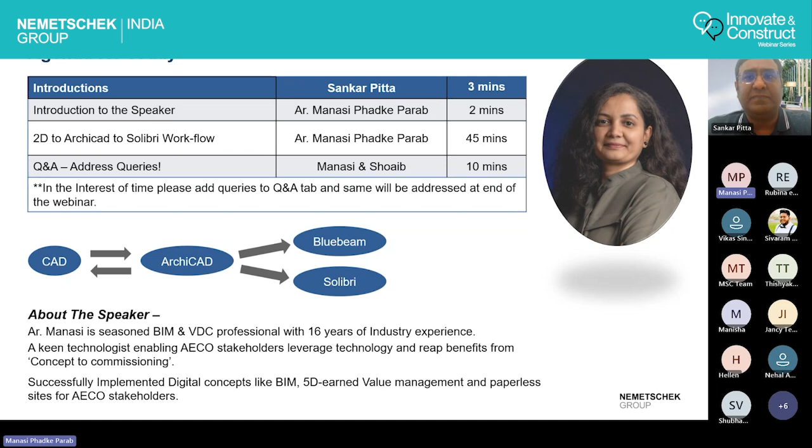To give you more insight on interoperability, we'll start off with a drawing file which goes into ArchiCAD. It comes back to the CAD environment through translators. Then this smart BIM authoring tool will push the data in terms of 2D PDFs and 3D PDFs to Bluebeam, which is again a collaboration tool.

And then we'll also push it to Solibri for all the automated design checks you can do, once all this information is flowing seamlessly from a CAD drawing to PDF, back to a BIM authoring tool, and then it goes and comes back to Solibri as well. So all these tools from the Nemetschek family have bidirectional interoperability with the popular drawing tools, and we'll see how exactly this workflow works shortly. So let's begin.

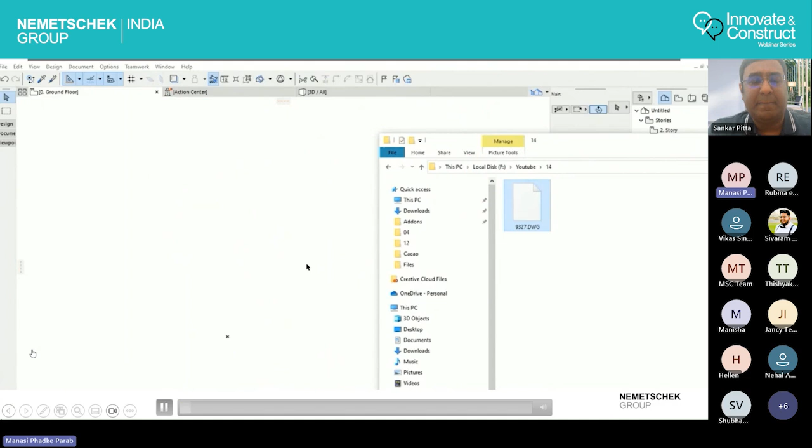So we have a blank ArchiCAD instance for you. Let me show the simplest method of drag and drop. Clearly, I don't have AutoCAD with me, hence the format is seen as .dwg. I'm dragging it. We can place it simply to the point and it's asking for units, so don't forget to add units. Let me select meter, meter here, and then we can simply place the instance.

Now we can go ahead and drag that instance to be placed at a proper origin point, or we can define the coordinates. Let me pick one and place it to the default origin of ArchiCAD in this instance.

So this was the simplest method, and now I can start drafting by picking the ArchiCAD wall tools. I'm picking the simplest generic wall, and you can always start drafting or mapping the same CAD instance with all the beautiful tools in ArchiCAD like walls, doors, windows, staircases, and so on.

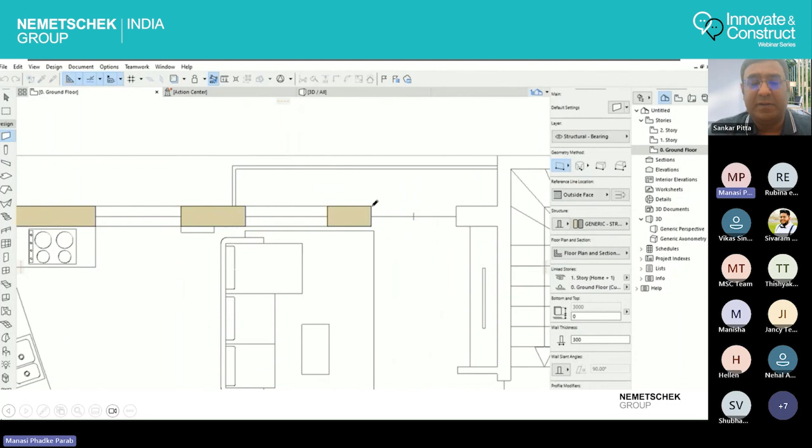So once we have this method here, we can see that it also has a drawing space. Let me take this pet palette here and I'll try to expand the drawing space of this particular CAD instance. Now, why is this important?

While I'm editing this drawing space, whenever I take something as a reference for modeling or drafting, this pet palette allows me to expand, edit this instance with the drawing or the paper area, what we call it, so that whenever I move this reference, I will always get the extents of this particular drawing defined as per my drafting requirements. So let me just edit this.

We are doing an offset now, and I'm also cutting it so that it maps with my exact structure plan or structure elevation. So now if I select this particular drawing instance, I can deduct, like I added a particular portion in the drawing space, I can also deduct a part of this drawing space for ease of working, so that when I have my paper space defined from the instance, I will know exactly how to add or attach these frames when I want to bring in some new references after this.

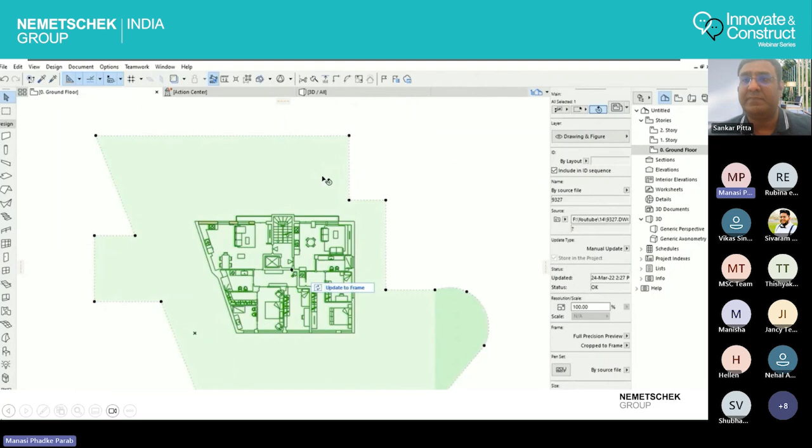So once I have this drawing reference with the proper drafting and paper space, and once I have this ready with the paper pet palette, I can simply drag this instance and you will see that the walls that I drafted just remain there. Do you see, when I'm trying to move this CAD instance, it is still within the limits of the drawing or the paper space that we selected, and the walls just remain there.

So we have a blank ArchiCAD instance. Let's delete this instance and let's look at the second and third method.

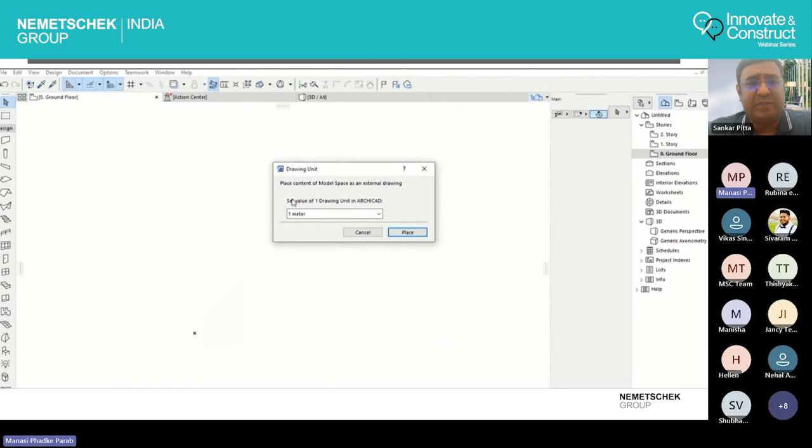We'll go to the external content. We'll simply place an external drawing with the native file formats or file format, that is CAD, and it will prompt units again, and we'll just bring in the native units and the settings from CAD and place the drawing just by clicking on the model space. So this particular instance will bring in all the native format and units, and this is another method to just bring the instance and start modeling.

So let's look at the third method, a little intelligent one, that is XREF. As the name suggests, I can attach an XREF here, and please remember that this particular method will allow me to seamlessly model with a particular reference, because of the changes and revisions.

For example, if someone is changing anything in the CAD instance, when I XREF it, I can reattach and reload the same drawing and still continue with the modeling along with the changes that may parallelly be happening in the 2D environment by some vendors who are not on the BIM path.

So we'll bring in a file again. We can check which particular drawing we want to XREF here. So we'll pick a drawing here.

I'm sure most of you would be aware of the two types of XREFs, that is attachment and overlay, wherein it works exactly the same in 2D as in ArchiCAD also.

And once we have our XREF here, we can further specify whether we want to align this particular file with certain origin, or specify XY coordinates, scale some coordinates or rotate a particular CAD instance, or simply specify the anchoring and the bounding box nodes also. Meaning I can specify when the CAD instance changes, from which point exactly is this going to change the instance. So bounding node or drawing's own origin will allow me to change these settings for my drawing.

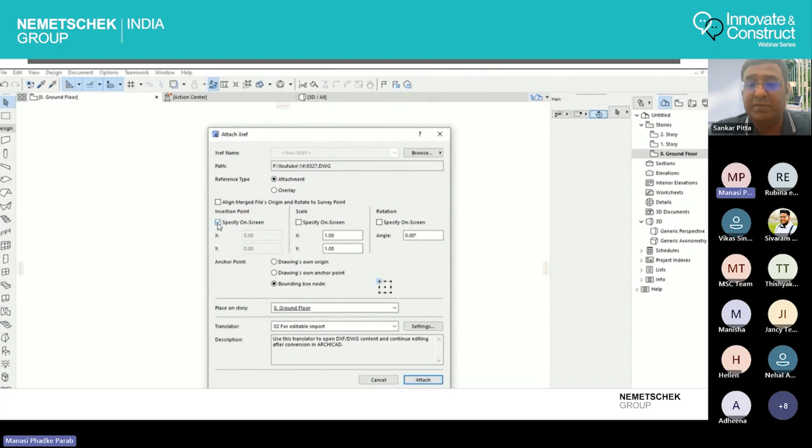So when I try to bring it in, I'm going to check which level or which story I'm going to place this instance. I'll stick with the default setting of translator, which is editable import. Once we have checked all the parameters here, the bounding nodes, the merging file origins, let's take it with drawing's own origin to just check out this method. And I will attach this particular drawing.

Again, it's going to prompt along with units the layers also, which I can bring in from CAD to ArchiCAD. So let's take the layers as well, and here is our drawing.

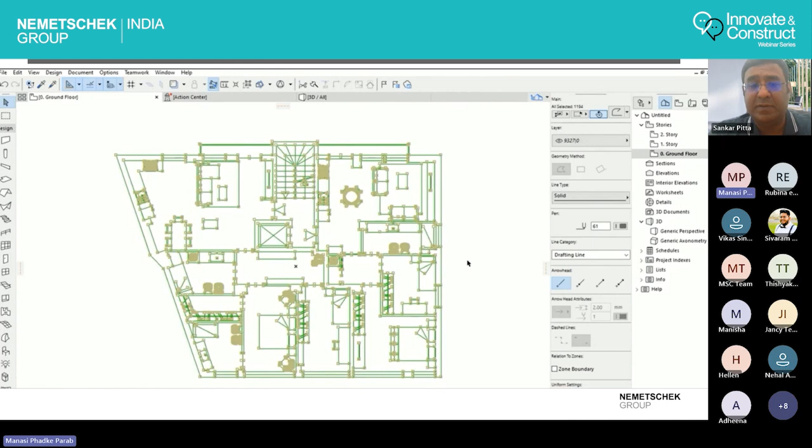So if I select this particular drawing now, it will come as polylines, everything is selected, not like the other instances which you saw in the first and the second method. So if I select something and zoom in, you'll see that every line is selected as a polyline.

I cannot delete these instances. Like the earlier instances, you saw me deleting while moving to the next methods, but this particular XREF, I cannot delete it just like that.

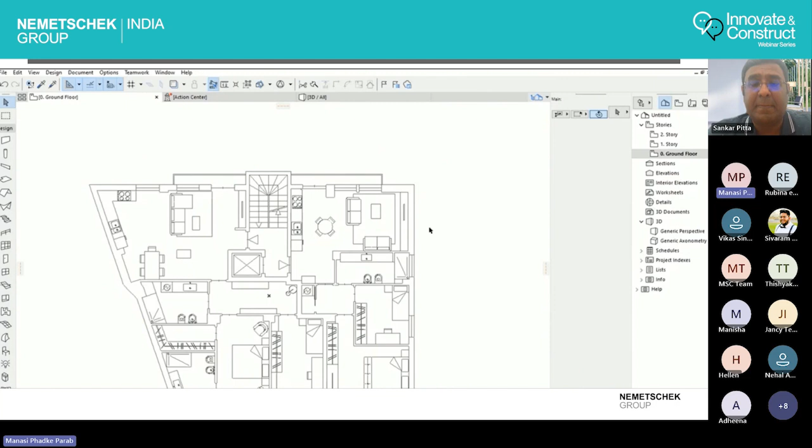So if I hit delete, nothing happens. The instance is kind of locked. I cannot delete this instance, but when I start working on this, I can simplify my workflow, because if anything changes in my 2D environment, it's going to reflect here very quickly. So that is another benefit of not being able to delete and lock.

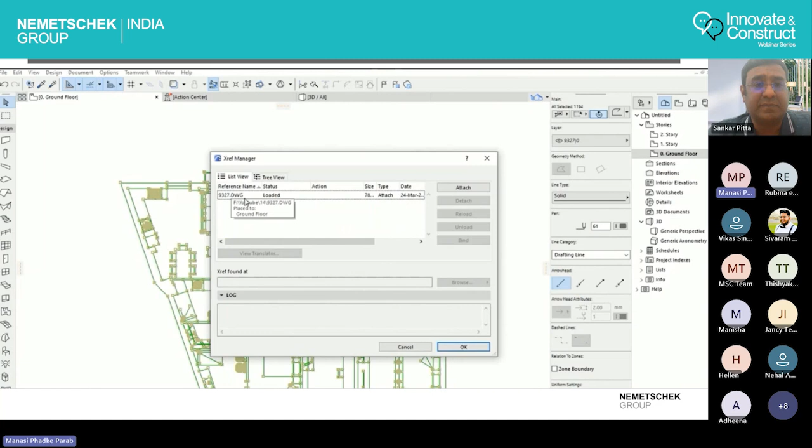Let's also check out the xref manager along with the polylines and the instance that has come in. Once this instance is here, we can load multiple instances, and we can go to the xref manager, wherein you can see which particular instance is right now loaded. I can reload, unload, bind the multiple instances later if I want to. I can set my translators here, and this is the simplest way of bringing in the layers also, which were missing in the earlier method.

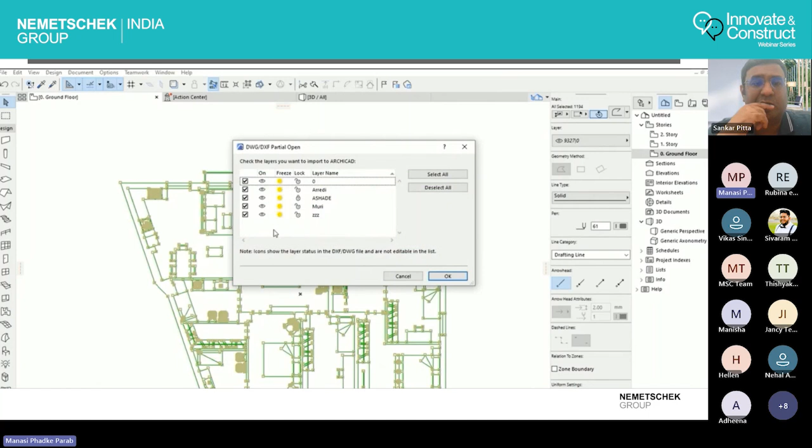So there you go, these were all three types of different methods to bring in CAD seamlessly into ArchiCAD and start modeling or create revisions while you go. Let's see the sizing as well. Then further, let's also see how this file can be used to resize.

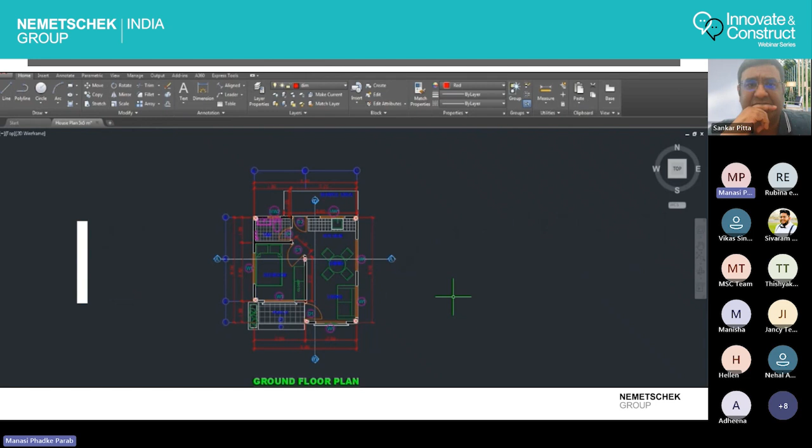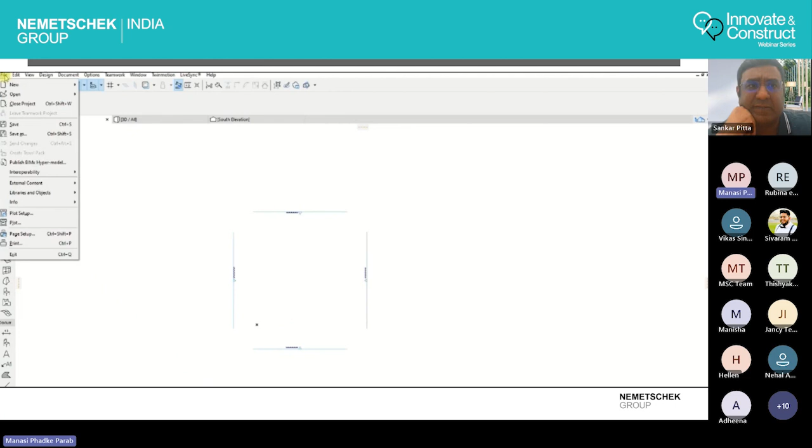I'm back in my CAD environment, and within the CAD environment, I'm selecting a reference dimension for me to resize or rescale or check my instance is correct. Don't forget to close the CAD file before bringing it to ArchiCAD. So I hit interoperability here, then I'm merging the file, the CAD file that I'm selecting here.

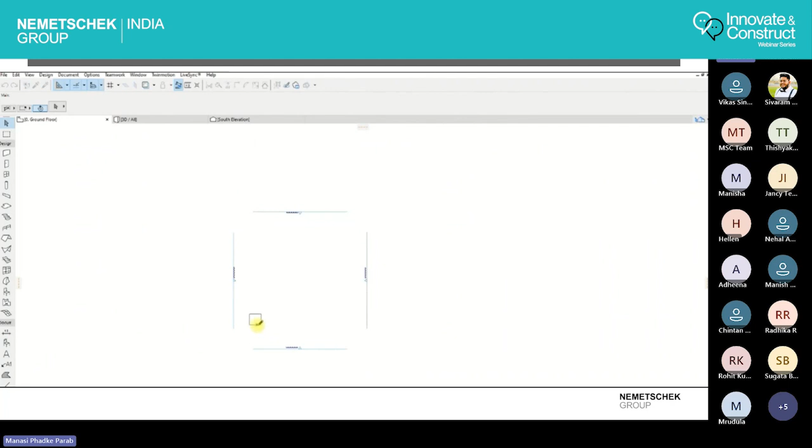I am merging it. Let's hit open. Again, it will ask me to merge or append. Let's merge this with default settings. Let me place it to the origin point with default XREF layers. And you will see that this is not a very scaled or correct, accurate drawing instance that has come in.

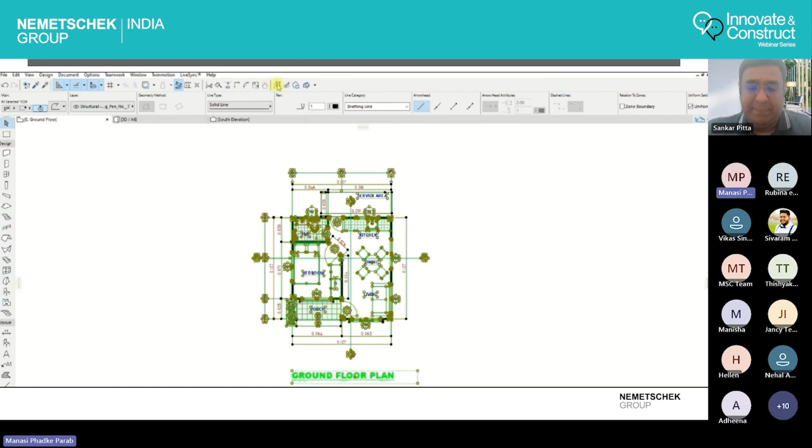Now, how to scale this? Let's see that also. We are going to use the same reference which we had referred or picked in our CAD environment. So let me first select everything, Control A, and let's ungroup this. This is a very important step because you can use Alt G or ungroup simply, but it's very important to suspend all the groups which are coming from the native format.

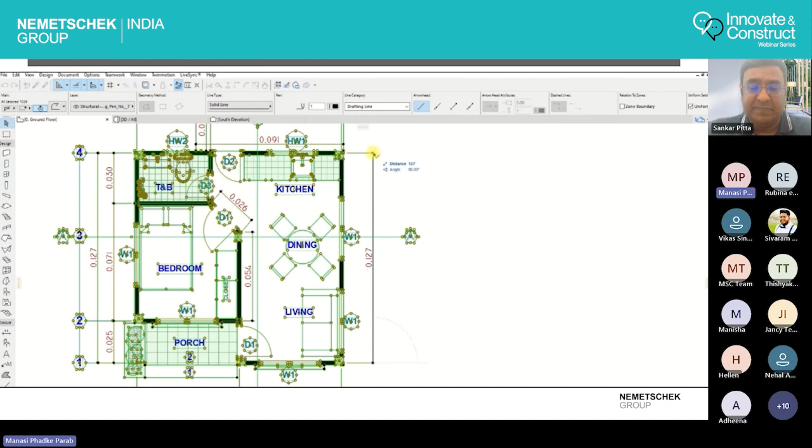So let's go to the reshape command under grouping, under file format, reshape, resize. I have the scales here, and then I'll pick reference point 1 to reference point 2. And then I have to give the dimension prompt, that is 5 meters in my drawing. So I'll try and add the same, adding 5000 mm, or you can simply type 5 meters.

And there we go. So now let's check if our file is correct. From my drawing, let's select the measurement or dimension tab to verify the same. Yeah, that's right, there you go. So this is how seamlessly you can bring in the files.

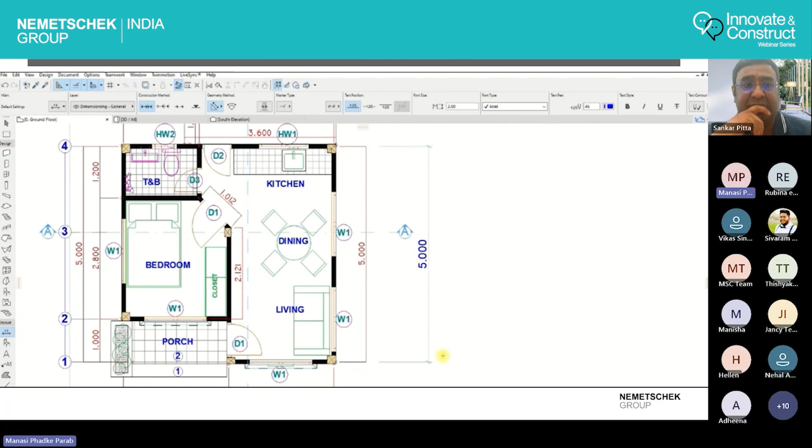So let's learn to export ArchiCAD plans and sections to DWG formats using this model. This is done with help of translators. Let me show you some views here, which I already have. I can create multiple views like these depending on the stories you want to export. So this is a floor plan of one story, meaning level.

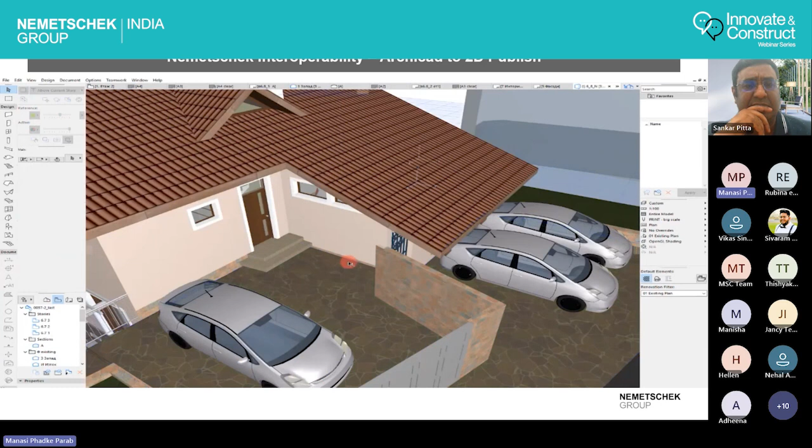Let me show you the 3D model of this as well. So this is a 3D model. Over here, there are views. If I double click, I'll go back to the floor plan. So let's navigate through the 3D model. 1, 2, and 3 are my levels. And I came back to the plan.

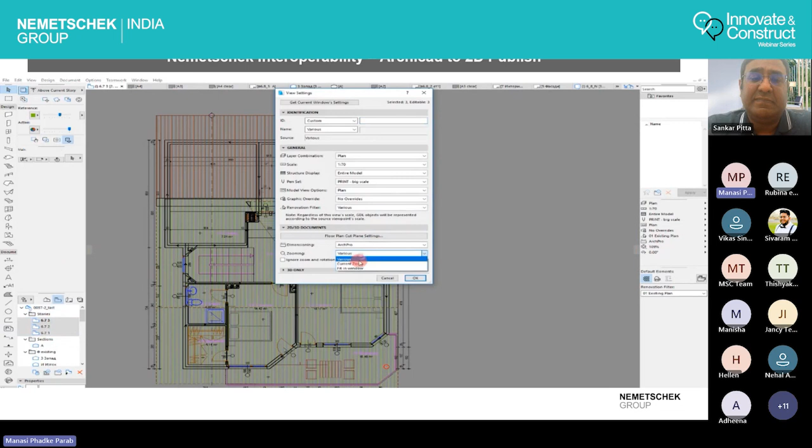So if I double click on any of these views, like the 3 stories, 3 floor plans are here, 6.71 to 6.73, I double click and open the third level floor. Let me see the zoom only mode for this particular layout. If that's right, I go back, I go to view settings, current zoom, say okay.

Each view has its layers, and let's go to layer combinations for the floor plan, as there could be many other layers we may not want to export now. ArchiCAD is stunning with layer management. So these are the layer combinations that you will see, and let me select one for plans to be exported.

But why do we export in the first place when we model and make drawings at one place? Because we allow vendors and non-BIM professionals to use this data for various construction demands, as they don't use teamwork or cloud or any other intelligent tools. Examples could be your elevator vendor, equipment vendor, or building material vendors, who want to use this data in the form of 2D drawing or PDFs. So let's check the staircase also first, and then we'll take out the floor plans and the critical sections for all the other non-BIM people to use this data.

So let me go to a floor plan and check a particular staircase. Yeah, that's going from the ground to the first level. Yeah, that's level. The level is right.

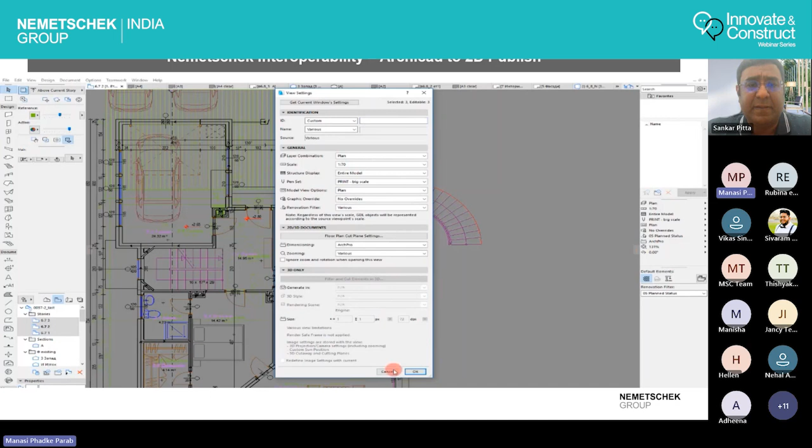I'll go to the view settings again for this particular view. I was in 6.73, entire model for structural display. Yeah, the plan is right, the model view options are right. It should be plans, the one that we selected, and let's hit OK.

Typically for a staircase, there are two lines when we see it in 3D, one dotted and one firm, but I made it simple in my layer combinations as one single line when it gets exported to AutoCAD, something like this. The one you see in pink should be seen in my CAD extract.

So now we'll go to the translators. Under navigator in my organizer, I am going to the navigator, and then I simply go to translators to check the translators. So before that, I come to this publisher set wherein I see all the DWGs here.

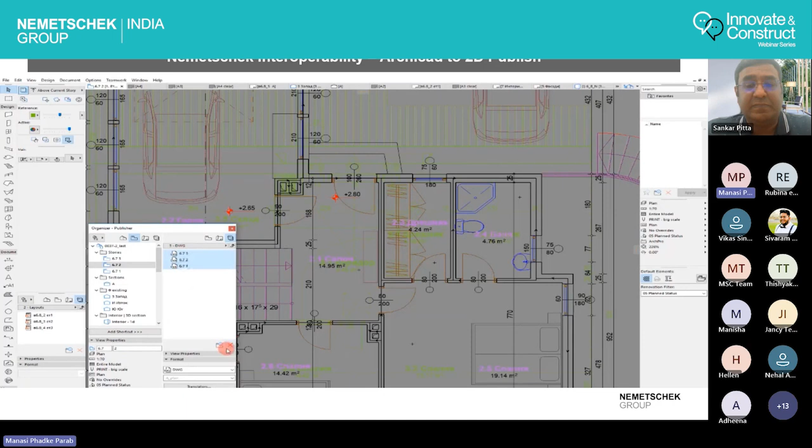This is my layout editor, and this is my publisher. I select one for DWG. These are ones which I had tried before, so let me delete this for you, and let's create from scratch how exactly these views are published for 2D. We'll also see the translators in a while.

So let me create one from scratch. We'll name it DWG. While we are creating it for all three stories, these are simple drag and drop, so from publisher, I am dragging and dropping the three design layouts into the DWG publisher folder that we created.

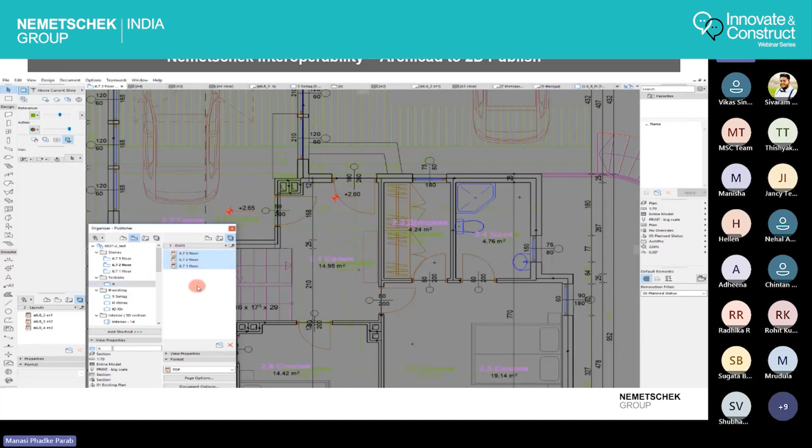We are giving a name for each floor if we want to change it. So if I change it in ArchiCAD design layout organizer, you will see it changes for the DWG set of 2D drawings also. Automatically it will update it to the DWG shortcut as well. So now we'll export the sections also in a similar manner.

So this was for the floor plans. Let's do it for sections. We'll go back to our organizer, go to the section views, and select our sections that we want to export.

And in the organizer again, I have my layout views. You can see here in publisher, I have a section A. And further, when I have selected these formats, which are DWG again, I made sure these all four design layouts as plan and sections are selected as drawing format for extracting it to 2D.

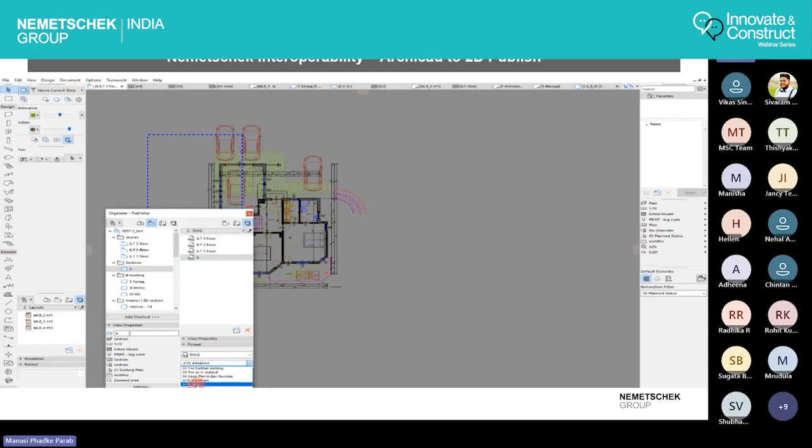Let me then go and check the view settings, and then we'll check the translators also. So let me see, all the layouts are here. The format is right. Here we have our translators from the layout settings.

Typically we can duplicate the existing ones that are there for you from the default template of ArchiCAD, or we can simply create a new one depending on our needs.

So first let's see duplicating one by renaming it to say A22 plan. We rename it. In settings I can change some attributes of it as well, regarding the saving options, the open options, and how my layer combinations would be.

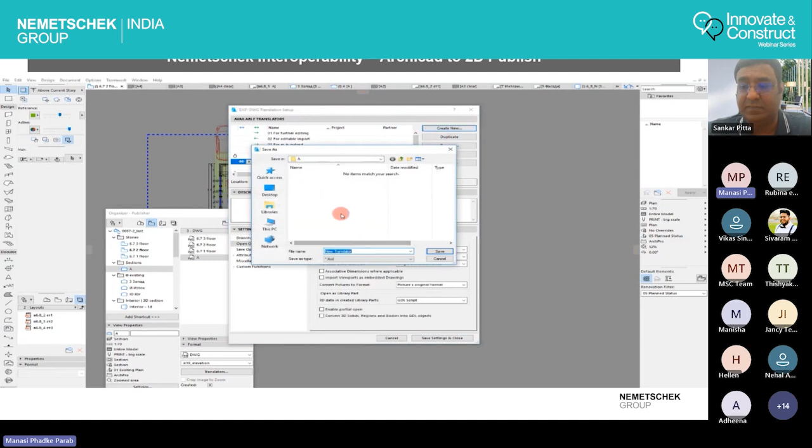So this is one way wherein I can create this, but let me create one from scratch for you as well. So let me delete this, the one that we just duplicated. And then let's create one translator from scratch, in which we will see the attribute settings also, we'll see the layer combinations that we want to export, and you will actually see how easy it is to set up the translators within ArchiCAD for a good quality export.

So I'm physically saving a file A22 plan, which is a template file, and now in settings and attributes I'm changing it. What version do I want to save it for, AutoCAD drawing file formats, what template files it should be, if it converts to images what it should be, saving layouts for which blocks.

We go back to the saving options, file options, and the important thing then would be to change the attributes. So once I have the drawing units in place, we are selecting the units again, which are 1:10 typically when it goes from ArchiCAD to a drawing file format. So please don't miss this step, to save and give the working units in ArchiCAD within the translator.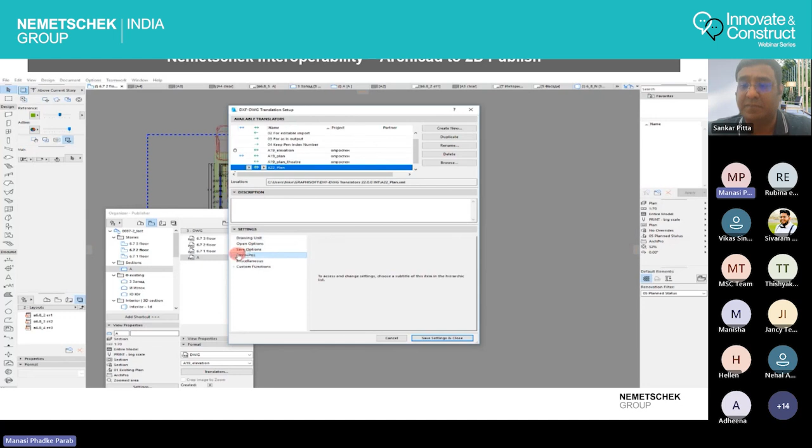So after this important step, we'll go back to our settings and attributes. Before that, when we go to attributes, it's all about your layers, your layer combinations, name of the layers, line types, and fills.

So let's go to layers first. Let me select typical layers that I want to have when my element goes to CAD. For example, doors, windows - DW or WI are typical names that I'll pick.

I can go back to one of the CAD files and check, if I want a particular list, I can bring in the source file here and map my layers one by one. It could be zones, certain layer names we want to customize. We can define where each element goes back to the drawing.

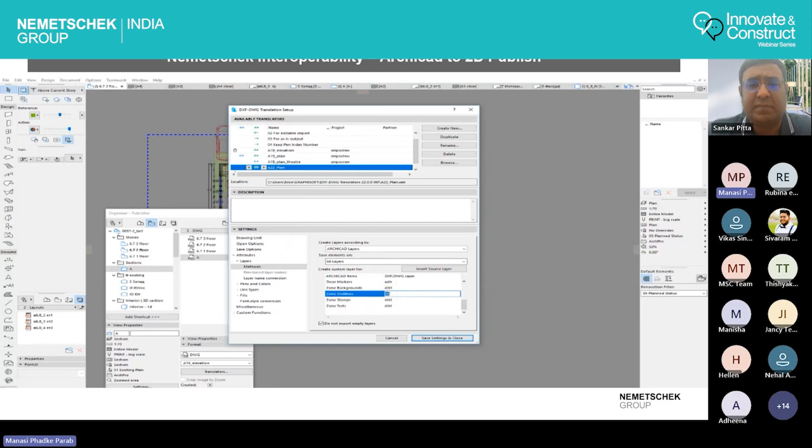So again, I'm giving zone information, ZA. Yeah, AN. AN would be fine. Zone backgrounds also have been selected.

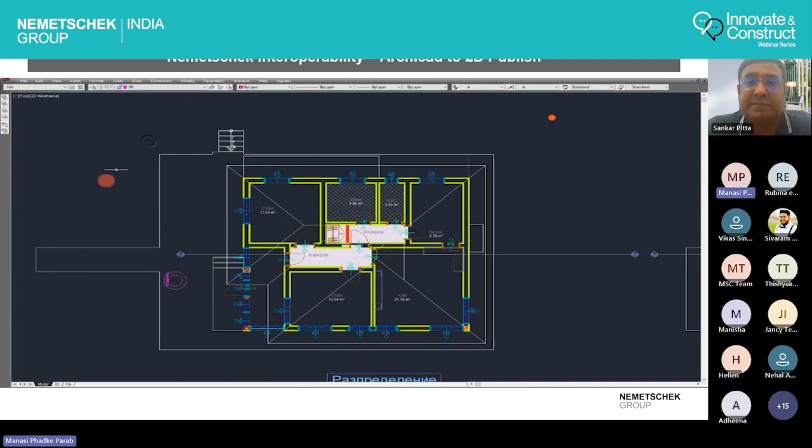Let me open a CAD file wherein I can check the list of layers or the nomenclature I want to follow for a particular line or format while checking my translator. So from this clean list you will see for a typical CAD file, we can always add, duplicate or delete and play with these layer name combinations.

So for ArchiCAD side, this is how the layers are placed along with the nomenclature. Let's try and create one under the same DWG publisher that we created just a minute ago.

And let's create one for the DWG side. I have the layers, we can add multiple as you want. And in the combination, we can decide which finish we have to pick - we are customizing the layers.

So basically, we are specifying which layer goes exactly where with the nomenclature, and how the drawing is to be symbolized when we open it back in CAD.

Okay, now we are in pen color conversion. The conversion table, we can also customize, or simply use the default one. Similarly with my ArchiCAD settings for the color RGB, I'll keep it default.

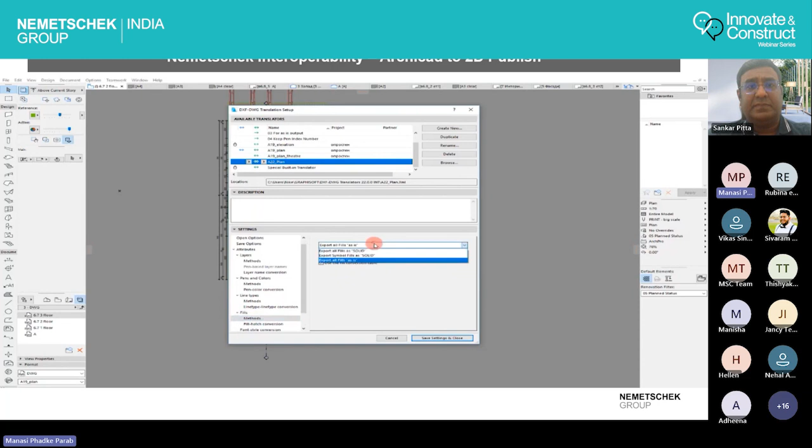For fills, let's add some fills, solid fills, and check a couple of hatch patterns so you can get an idea of how the fill charts look and how the fill conversions look.

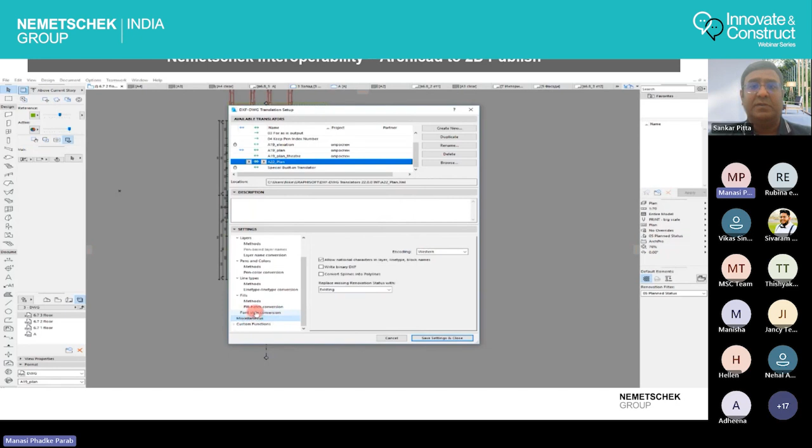So under fill hatch patterns, we added one for solid, a solid hatch type. We select a pattern, we name it, okay. We can give the scale, hatch scale, also here.

Let's add one more for the slant one, or let's pick vertical. Again, the scale is given, the fill hatch patterns are given.

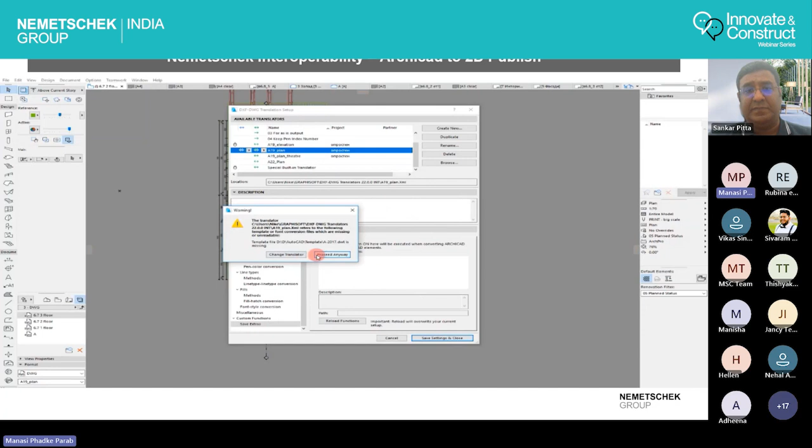In miscellaneous, you can see certain font styles before we go on to really exporting the translator. Let's pick some font style here quickly - typically we'll pick the default one again, and let's proceed.

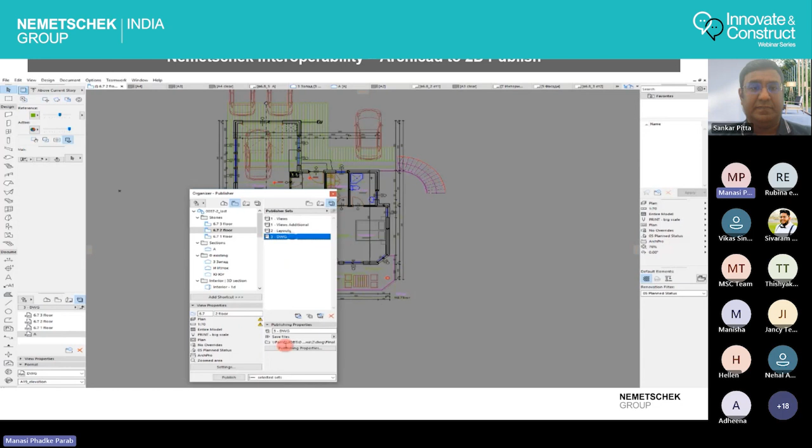So all our 4 layouts, design layouts, are published into the DWG folder set that we created. This folder I'm creating, and we'll push it to the CAD file format, and let's see how it looks back in our CAD environment.

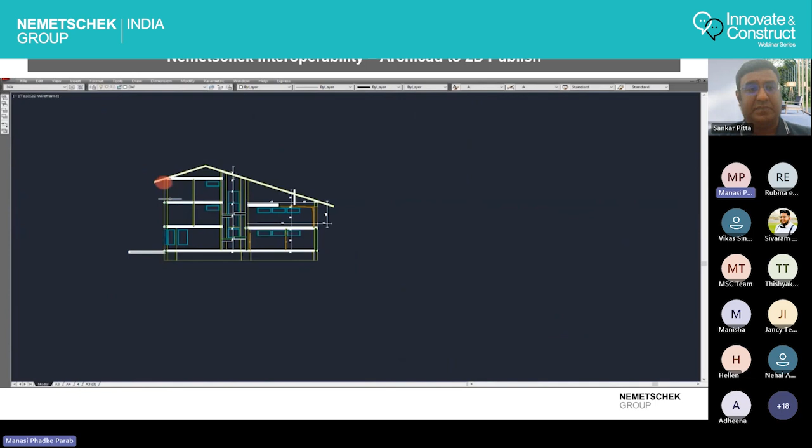So once I have the model, I have my layouts in place, I have checked the translators, the attributes, the published set of the same - this is exactly how it comes into the CAD format. The one section layout that we selected and the 3-4 drawing layouts that we had selected.

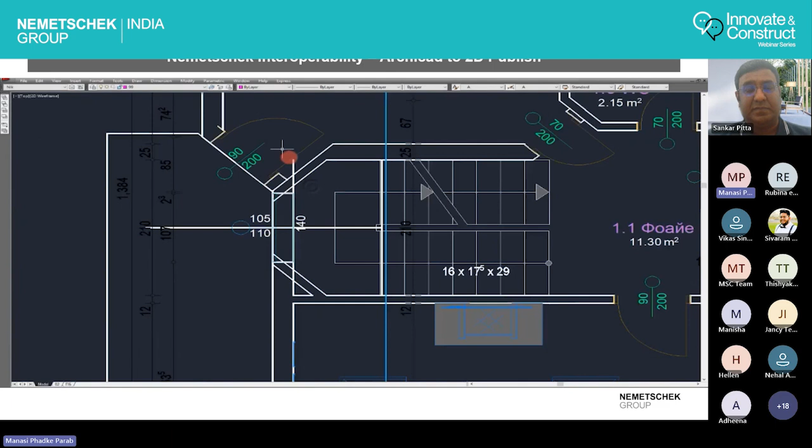So it is one tab each within the same CAD file with the different all 4 layouts as 4 different files. We are simply switching and checking the layers as well. So the same list of layers is brought over - congratulations, the backward integration is exactly how this works.

Now, moving forward, once we have seen the connection from 2D to 3D and back, we also have Bluebeam, which is purely for PDFs. The ArchiCAD and Bluebeam connection provides direct access to the features most commonly used during design review.

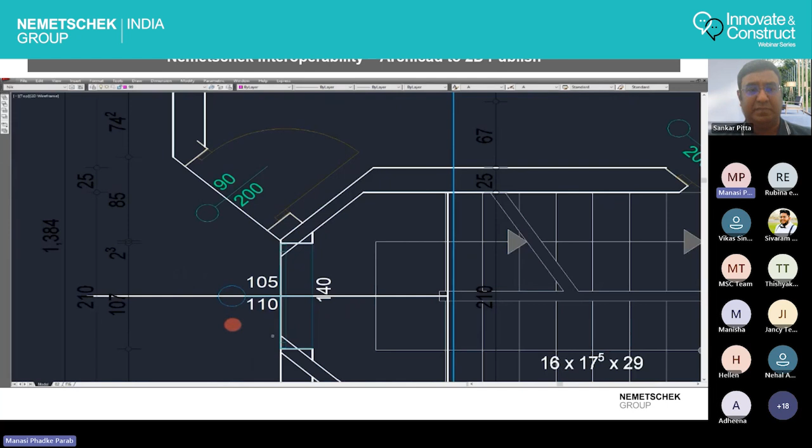So what is the biggest hurdle in moving from CAD to BIM? Please do submit your responses.

I think a couple of facts I came across while getting this poll done: there was a study by McGraw Hill Construction where they found that 71% of construction professionals reported improved communication and coordination through BIM. That's a very good data. Similarly, a study by Stanford found that BIM enabled architects to explore more range of design options and iterate designs more effectively. I think that's another superb piece of data convincing that all designs or workflows should be done on BIM.

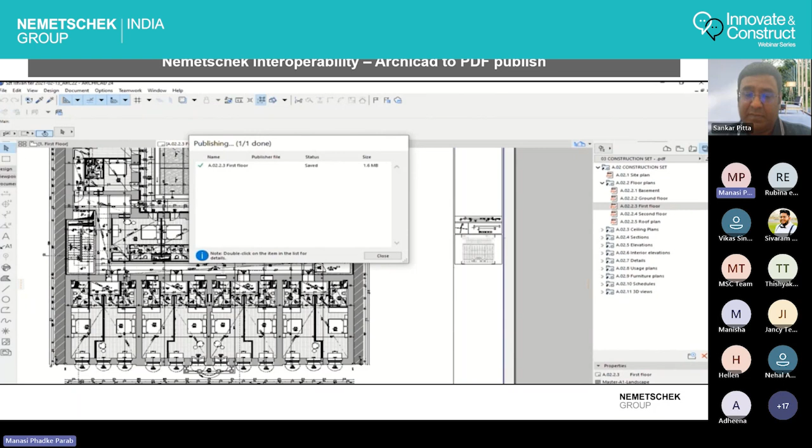Within ArchiCAD, the same files can be translated to Bluebeam. Right now in ArchiCAD, we are publishing a set of drawings as PDFs. We are selecting a particular folder to publish. All the layouts are being published to Bluebeam one by one. Once all the drawings, plans, sections are published to Bluebeam, we'll switch to the Bluebeam interface to see how this works.

In Bluebeam, the same files are opened in Bluebeam Review, and each team can mark up in real time with proper color coding for their issues. This color coding can happen for each discipline with their unique tool chest icons. Different stakeholders can decide to mark up and review the same documents at a time with color codes via Bluebeam Studio sessions.

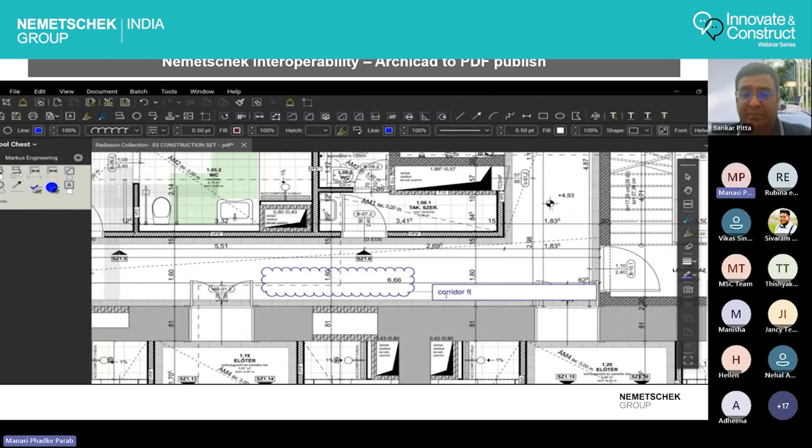Once the markups are placed, we can see a list of the markups and issues for the same drawings, wherein all markups can be accurately tracked and we can push it back to the native file format.

Back to ArchiCAD, we can see exactly with Bluebeam connection the same markups which we have saved from Bluebeam Review. We are bringing it back to the ArchiCAD import. Once we import, you will see the same blue and red markups with those same data onto the ArchiCAD, exactly at the same position.

This can be used by multiple stakeholders at a time. Inside ArchiCAD, there is also an issue manager wherein I can mark the owner of that particular issue, and then save that issue for priorities, for a date stamp, for the frequency, how this issue is to be tracked, who is to resolve it, and create my record here itself.

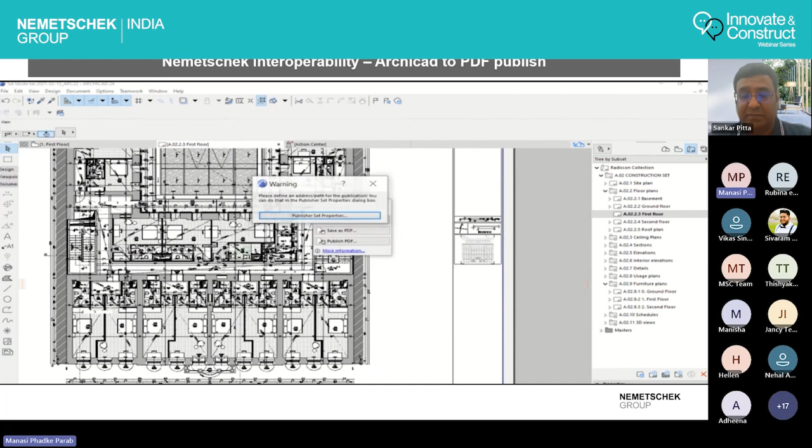Once I make this issue organizer within ArchiCAD for the markups, this process can continue for all the revisions we have to do. Once the revisions and all the issues are saved in ArchiCAD, we can go back to the Bluebeam connection, which is directly linked. So I'm not opening different formats separately. I will open the published drawing layouts into Bluebeam with these same revisions inside Bluebeam Review.

Now that we have all our information in 3D and 2D, let's see how we can review it on our mobiles also. This is exactly how my mobile interface or web application will look. I'll have these kind of tabs.

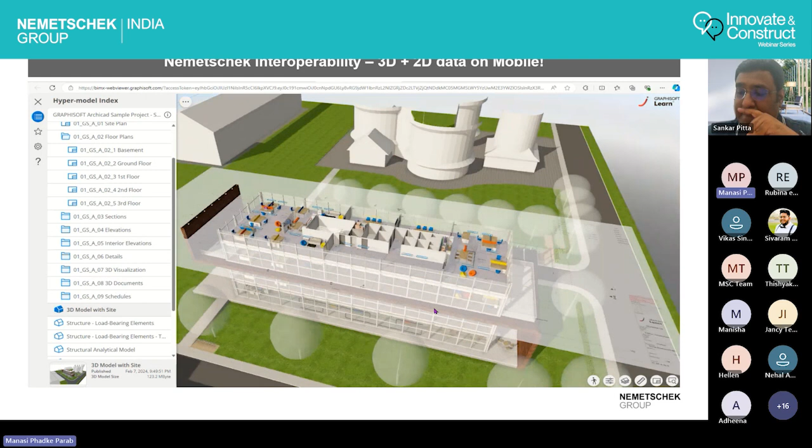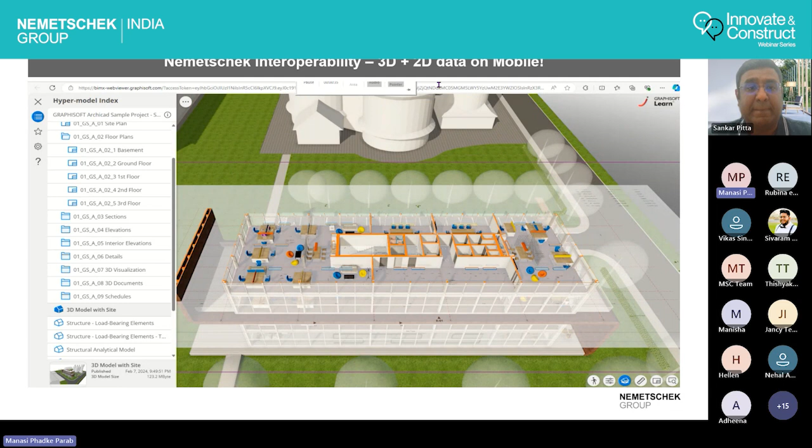I just click on it, say 2D, and wherever the 2D drawing is referenced in 3D, the mobile application will allow me to toggle between 3D and 2D, so there's no need to cross-reference my 3D and 2D data. On my mobile, with a few clicks and pre-settings, I can simply toggle between the drawing and view constantly, checking whether I have my information right in 3D as well as on the 2D detailed drawings.

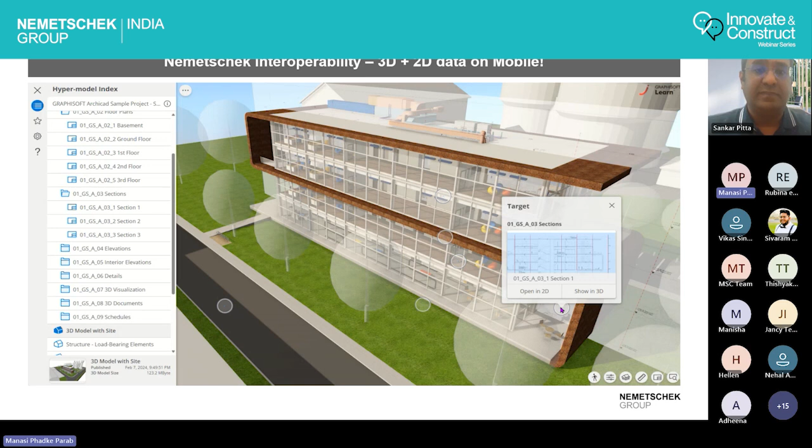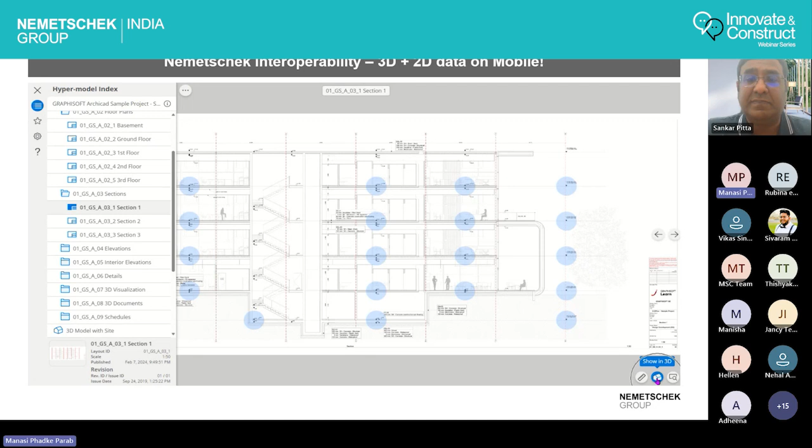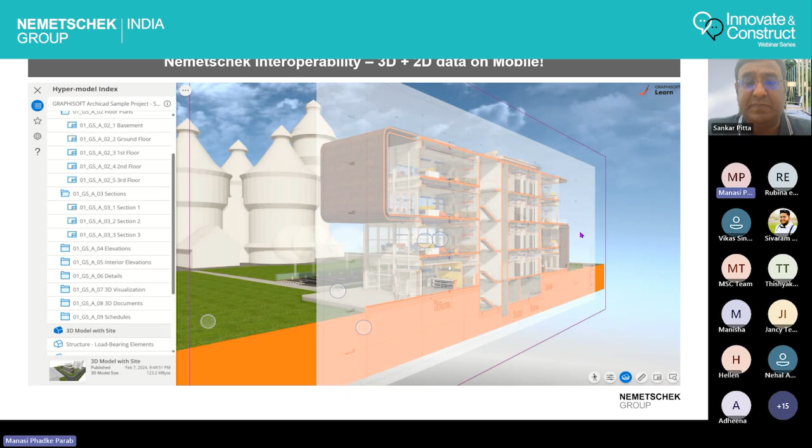This is an example of a section, wherein if I click on a 2D section, it takes me exactly where this section was cut into a 3D model, and I can review it, toggle it, flip the section plane, go back to my 3D environment, flip it, and really review it and take decisions faster while on site. This site application on mobile or on tabs can allow certain level of offline working as well.

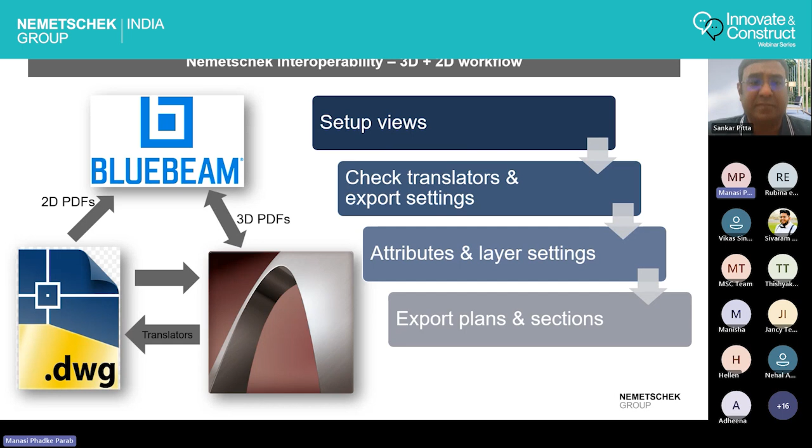So we saw all this workflow again, right? Starting from 2D to ArchiCAD, back to 2D, and then pushing the bidirectional PDFs for markups and seamless collaboration. All we need to do is within ArchiCAD, set up good views, check our translators and export settings. We need to check the attributes and layer settings, which is very familiar from our CAD environment, and then export the plans and sections as and when necessary for 2D working or for PDF collaboration. Once all this workflow is set up, we move on to the next segment, that is automated design checks. But I think there is another poll now, Sankar.

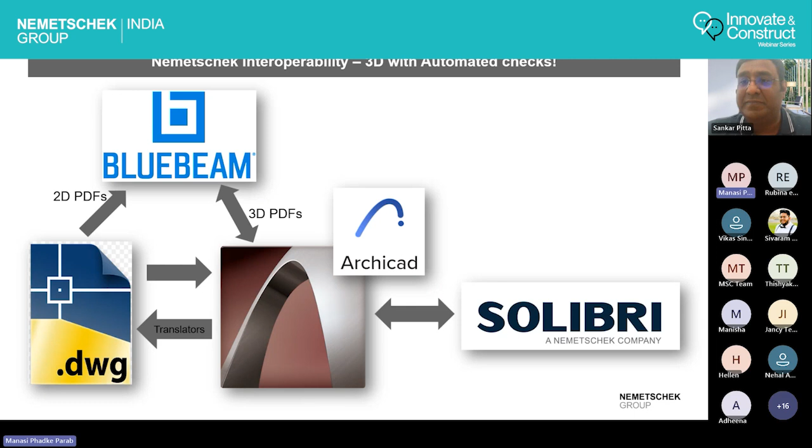Okay, so Manasi, go ahead. We will go to our next segment, and the last segment of today's webinar, that is automated design checks with Solibri. So what exactly is the Solibri tool?

It is not a BIM authoring tool, but it is a BIM model checker, a reviewer. The tool is called Solibri Office, and it helps check models with a set of rules and logic for area considerations, bylaws, design coordination, design checking, even digital data handover, and certain constructability checks along with green rating.

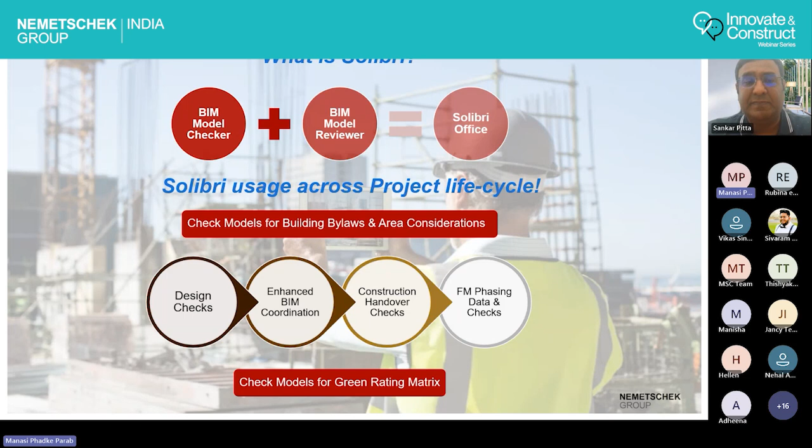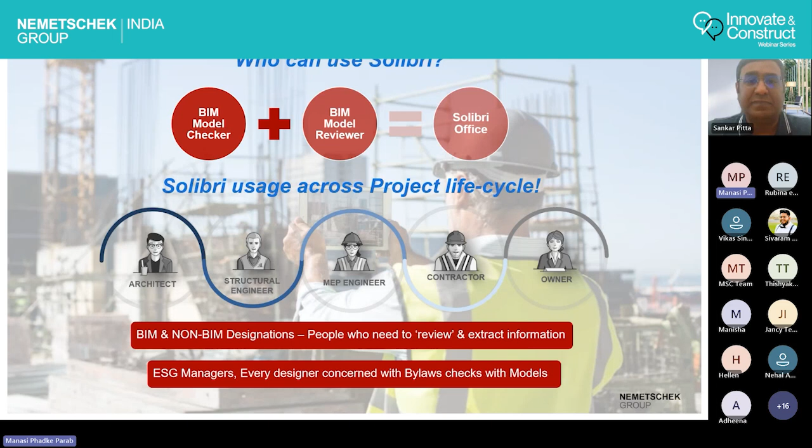So who all can use this kind of tool? All of the stakeholders, architects, engineers, the contractor, the owner, or even non-BIM and BIM designations can use Solibri to review, extract information, and slice and dice the model. Even ESG managers and sustainability designers concerned with bylaws and green rating can explore Solibri for checking the model, which comes in multiple file formats. Solibri is able to federate a model with multiple file formats with more than 60 plus logics, and we can create 200 plus rules for automated checks to be performed.

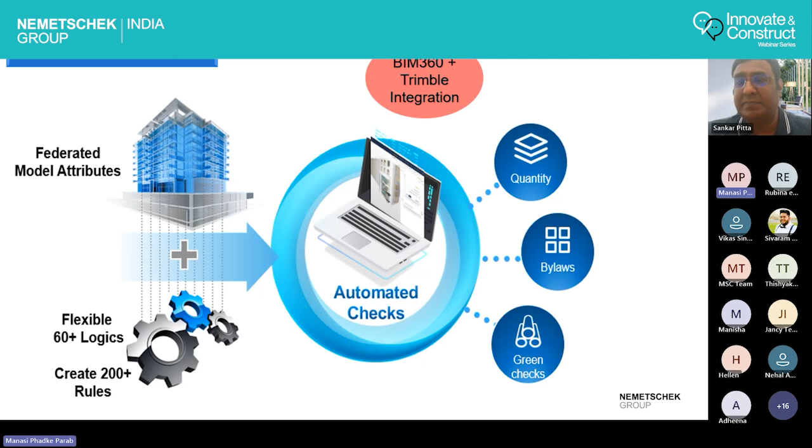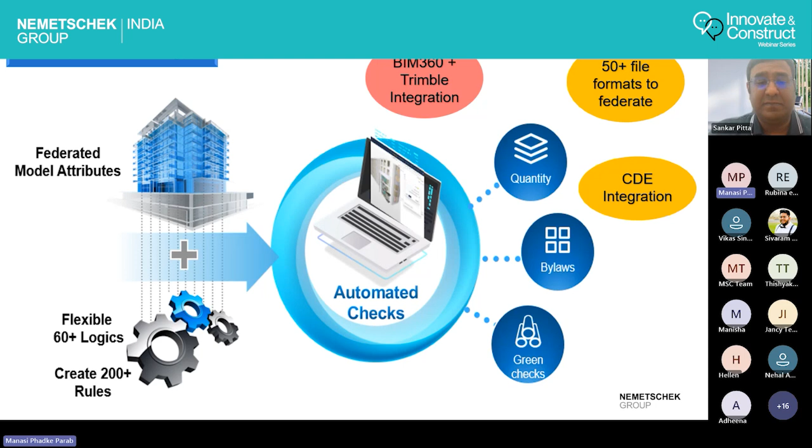So the workflow is: we have a federated model in Solibri for reviewing, slicing and dicing. Then we have a set of logics and rules which can automatically flag certain errors or problems in the model, related to quantities, area considerations, bylaws, and green checks. It also has integration with popular tools like Trimble Connect or BIM 360, and I can fetch 50 plus file formats to federate within Solibri for automated checking. Solibri can also integrate for fetching IFC data with common data environments like Aconex, Catenda, BuildSync, and so on.

So how exactly does this work? There are different models coming in with different file formats, be it for spacing, areas, architecture, structure, or MEP—everything gets integrated into one file. Then checks are performed, even for clashes and design checks. The issues are flagged, reports are generated, or the issues are sent to the native BIM authoring tools. A coordination report can be populated, and then after improvising the model, a final model is generated for digital handover.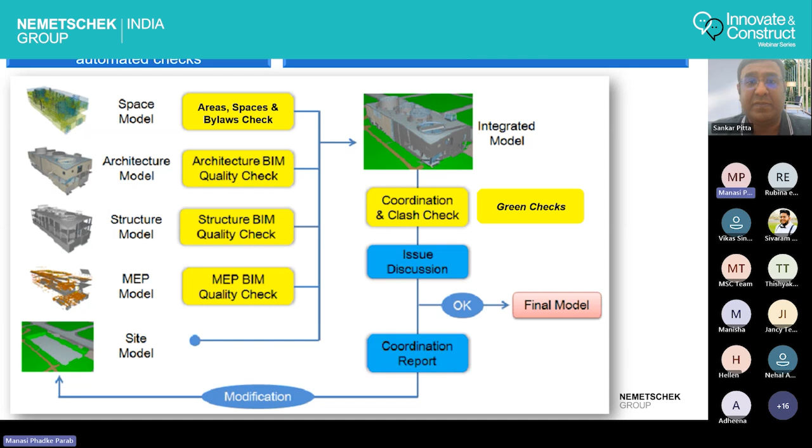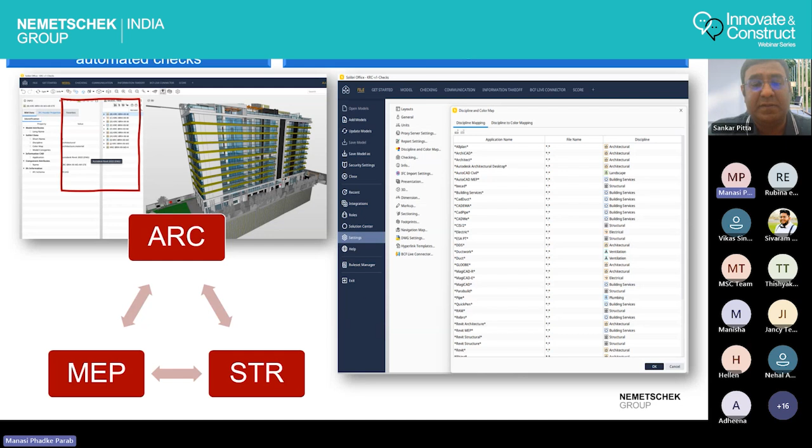So this is an example of how a federated model works. There could be different files coming in from different file formats, and this is exactly how Solibri understands the discipline—the application and the discipline are correlated. So whatever file format it comes from, Solibri takes in the IFC file and segregates it into a category or discipline. Then with these kinds of logics, we can check the model.

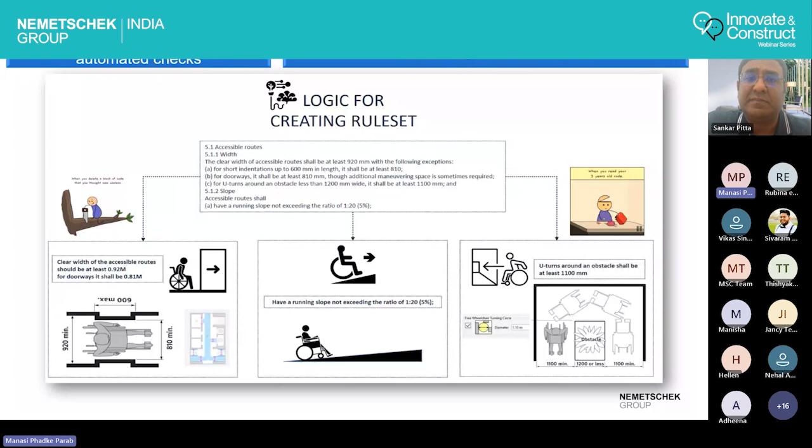To help you understand how the 60 plus or 200 logics and rule sets are created, here's an example from our very own bylaws, wherein for specially able people, we need certain clearances to move around—like 920 being the opening, 1100 being the circulation area, and 1:20 as a default or maximum slope for all models. Once these models come into Solibri, it runs a check. As you see on the left hand side, it flags issues with certain colors of red, orange, and yellow, showing exactly in the model along with dimensions where these particular rules are not followed. This is just one logic inside Solibri—we can generate and run as many checks as required for designing, bylaws, as well as constructability issues.

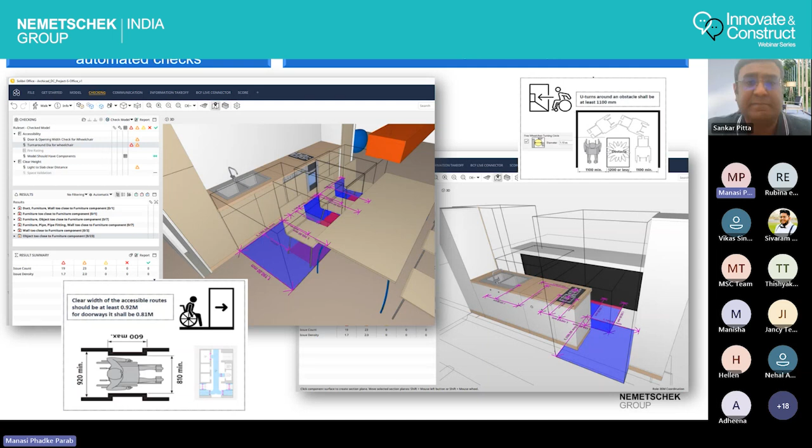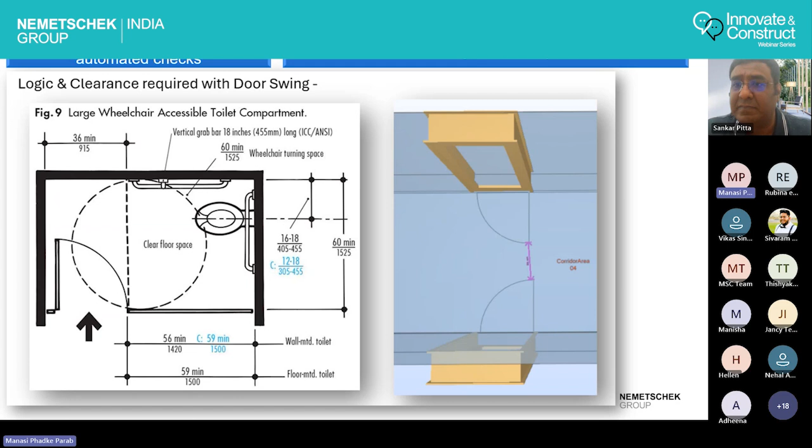To give you a very basic example, in any BIM authoring tool today, the doors are in 3D but the leaf of the door is always 2D. But the requirement of checking goes as detailed as checking the clear floor space, like the specially abled toilets or fire escape doors. Solibri is able to understand the circulation or clear floor space, and it can flag whatever component is coming between these doors or circulation lines. This kind of intelligence and flagging design checks is built in inside Solibri. All we have to do is toggle the editable parameters and identify the classifications needed for running these smarter checks.

I can use this not only for design checks but also for constructability issues, for example, checking if firefighting information is captured in my model. On the left hand side is a long list of all the rules, with an image showing how I can classify my model and whether information is captured, such as the necessary fire rating. The color red specifies 1.5 hours fire rating for walls, yellow indicates 30 minutes, and gray highlighted walls have no classification or fire rating information. This is how designers can check models are ready for all the fire norms.

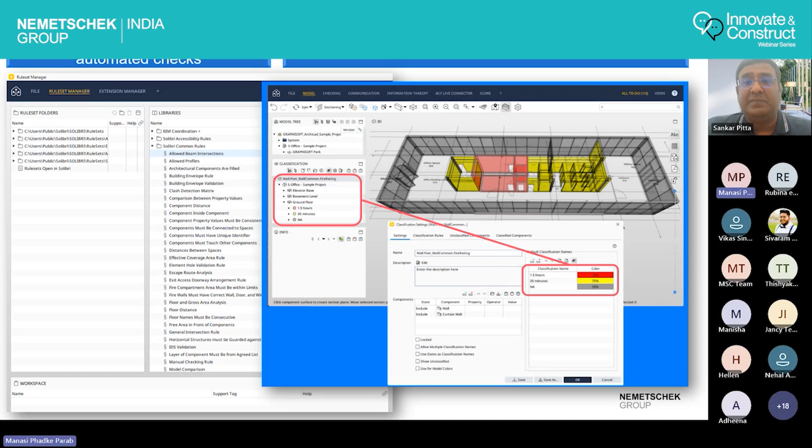As you see on the left hand side, the list is very long: coordination, accessibility rules, area calculations, parking rules, components that are clashing, or coverages required for installation of certain elements. All these kinds of checks can be performed very efficiently in Solibri Office.

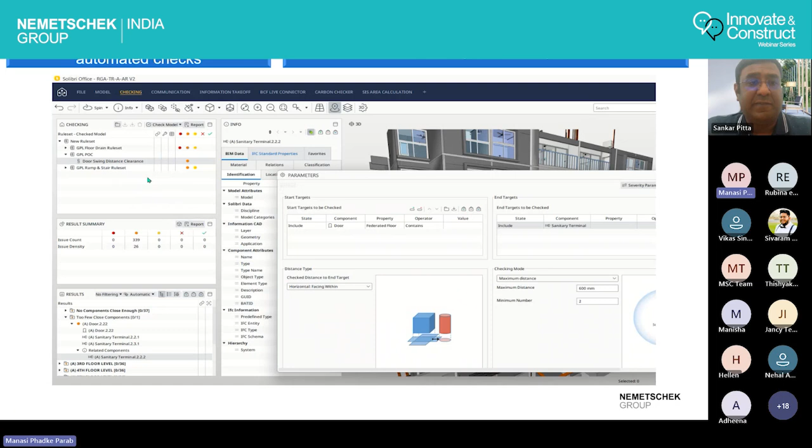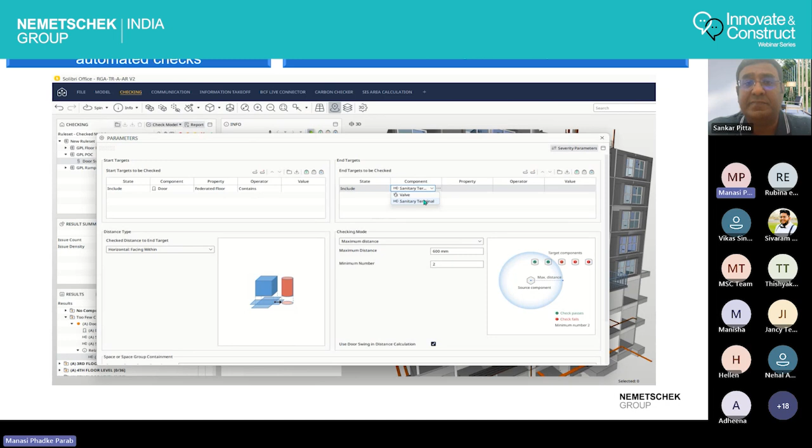This is one example of how the checking happens. On the left hand side you can see the checking part. I can right click and show you one rule wherein a component is selected. There's a start target component and an end target component, which is the terminal. I can specify the distance, select the door swing, and edit all these parameters of a rule set or logic to run the checks. We simply hit check the model, and a result and summary along with images pops up very quickly.

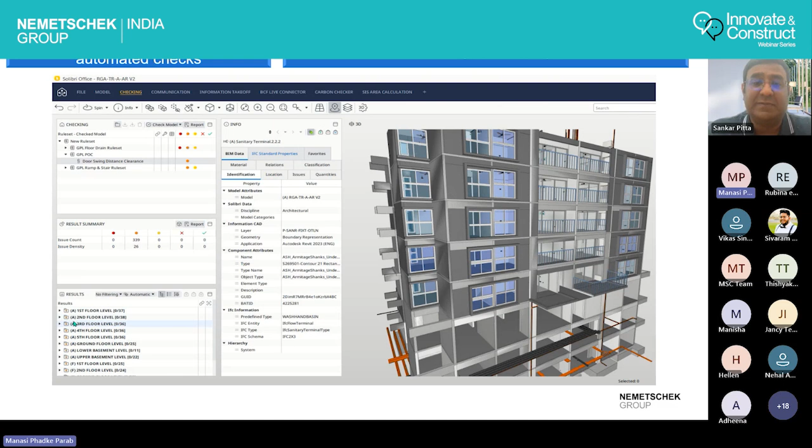This kind of result or summary can be extracted into Excel, PDF, or pushed through BCF live integrations. Most of you must be aware of intelligent communication platforms, and the industry standard is the BCF file format. No matter which authoring tool you're working with, you can push this information. The snapshot on the right will push all the information with issues live onto the authoring tool, avoiding the traditional process of Excel files, PDF files, design review workshops with ping pong back and forth, by which time site timelines are already pushed. So there's an option of BCF live issues collaboration.

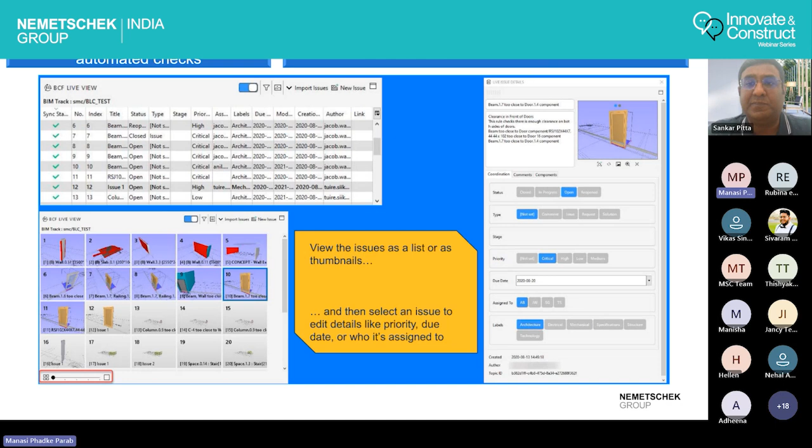While doing all this, Graphisoft ArchiCAD still remains the centerpiece because a lot of our clients have already invested into Microsoft Power Automate. The whole process of extracting IFCs, checking it in Solibri, pushing the BCF reports, and then editing my model in ArchiCAD can be automated. There's an automated workflow with all these tools available via Power Automate, which saves time extracting files, sending them to a tool, and having a report to actually take design decisions.